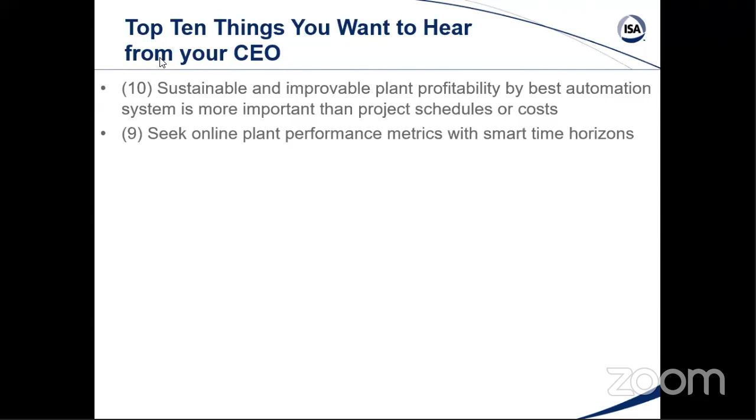Seek online plant performance metrics with smart time horizons - do you think they could understand what's smart? Take the time to learn new technologies and exploit them, like the digital twin.

Read and understand my books. Apply the best practices of the handbook we just finished - Hunter and I just finished it. I've read and understood the automation competency model.

I did a Control Talk column on this, and I don't think hardly anybody in ISA knew about it. If you go to their website, you can find something about it, but it's really not a key part of it - it's some separate organization, the Automation Federation. But we actually have helped them revise and update this in the last 10 years. There's actually an automation competency model, and it goes into what we think are the skills that are beneficial for different types of jobs in the automation industry.

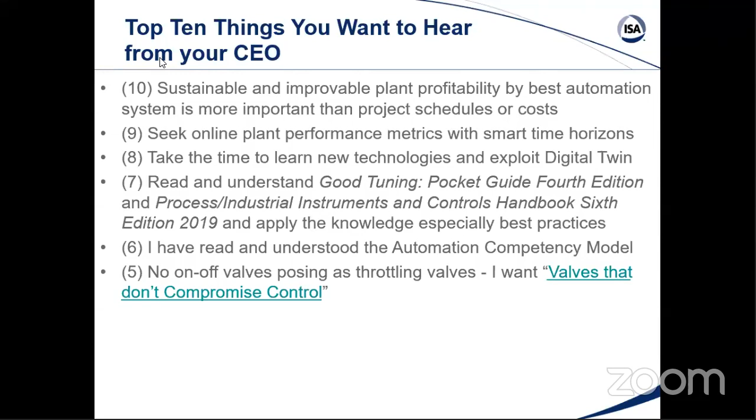No on-off valves posing as throttling valves. I want valves that don't compromise control - that's been my mission. Because it started out with surge valves causing all kinds of headaches, but it went way beyond that. People buying valves because, you know, on their spec sheet it says what is the leakage - oh, less leakage is better, so that was their primary consideration. Tight shut-off valves, piping valves that met the piping spec, had huge capacities - big capacity, minimum leakage. What can be better than that, right?

I want what is truly important for measurements and valves. That would be nice for a CEO to say that. And these are the links - when you see that, those are the hyperlinks.

No low bid packaged equipment - boy, I've been burnt by packaged equipment. Make innovative process control improvements - I'm not sure they would know what a process control improvement is. And finally, you decide what is best.

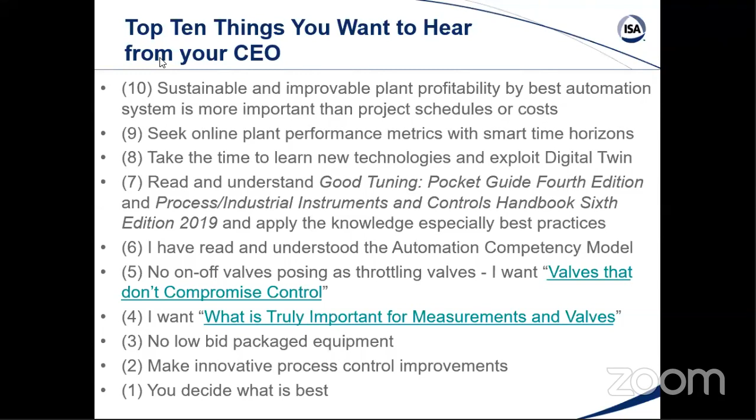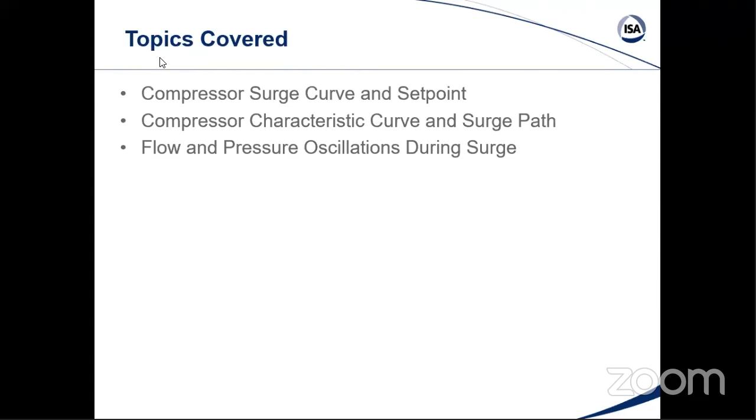Wouldn't you like to hear that? Okay, topics covered: compressor surge curve and set point, getting at the heart of the problem and really why we have this extreme behavior. And we see that in terms of the characteristic curve, and the path of surge, and flow and pressure oscillation during surge.

And what can we do for compressor surge protection and efficiency maximization? What are the sources of the automation system dynamics? Compressor control systems are very sensitive to everything being fast enough. And the question is, how fast is fast, and how critical is that?

How to make valve response faster? There's been big misconceptions that date back probably 50 years. Valve alerts are what you should be concerned about.

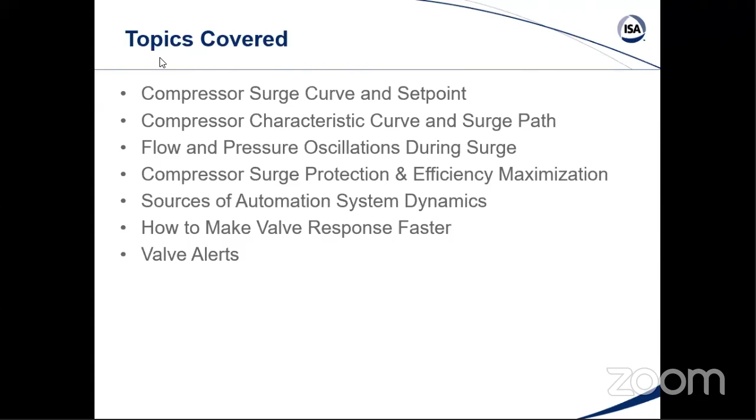Digital twin use, improvements offered, opportunities, and new blocks. Digital twin is the new name for doing a virtual plant - I've been told not to use that term anymore. It has to do with the fact that the virtual plant may be considered to be something that is necessarily in the cloud, even though in our case it wasn't - it was on our laptops. But anyway, the term is digital twin now, and we'll get into that. I'm kind of understanding now why we say that, and how I've had to get with what really is the terms that marketing and people higher up than me really want to hear.

Details on control system implementation, best practices, and what are the resources?

Okay, well, whoops. How do we advance? I wanted to go to the next page. I hit the arrow and it just rebuilds. So... space bar? Oh.

Okay, the animation is kind of messing things up. So if I went through the whole animation again, would it have moved to the next slide? I don't know. All right, we'll find out.

Now, the objective is to keep the operating point to the right of the surge curve. So why not generate a set point that's kind of parallel to the surge curve? And it literally is a curve. For a centrifugal compressor, it tends to have this type of shape, an exponential shape.

Here, if it's an axial compressor, it would tend to bend over here. But for centrifugal compressors, it tends to just continue on like that. Each characteristic curve for a particular speed gets steep, and then it gets flatter and flatter. And the point where the slope is 0 is the surge point. That's how you know you're at surge.

Now, if you think about this, if you go along here, as the pressure goes up, you're going to have more of a driving force to force flow. So it'll tend to self-regulate itself to an extent, and it's got a negative slope here. That's providing the negative feedback in the process that is providing some self-regulation. So that helps. However, when you get to 0 slope, it's probably too late.

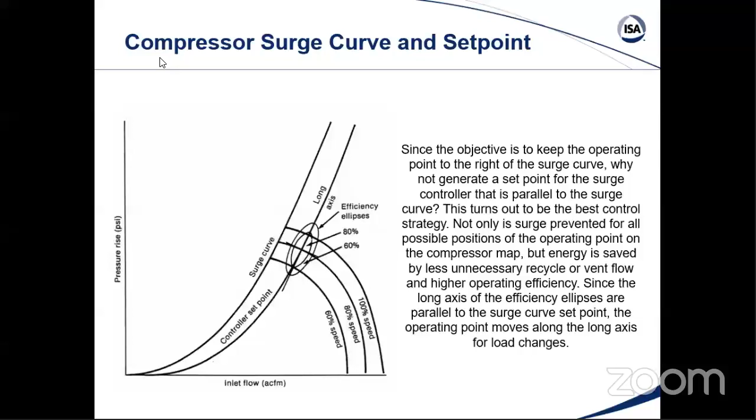So we're going to look at what's on the other side of that surge curve. I know you're probably pretty excited about this right now, the mystery.

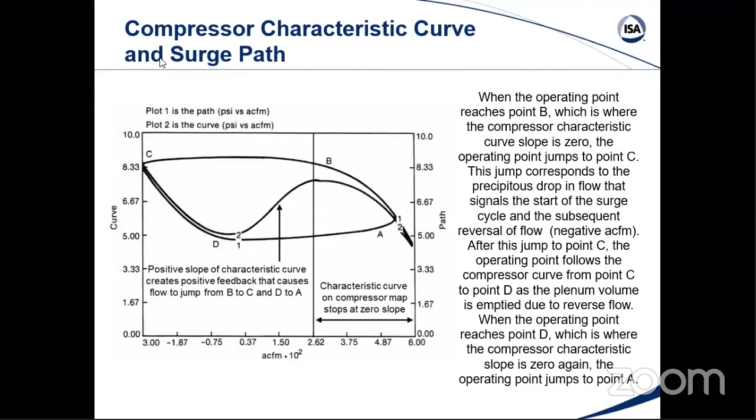So these are the oscillations, pretty dramatic. It's interesting, these periods here are faster because it was like a laboratory or pilot plant situation. Industrial plants, the oscillation periods tend to be about 1 to 2 seconds, which are still incredibly fast.

I once thought, well, if I just had a very fast analog control system and a very fast valve, it could get me out of surge. But these oscillations are so extreme, being a period of 1 to 2 seconds, you can just imagine what a feedback controller is thinking and trying to do in that time period.

In fact, the clue was, I kind of knew this, but the operator, he saw these few surge cycles and he stepped in right away and put it in manual and opened up the valve to a point where it would prevent surge. And that turns out to be the solution. But you want intelligence to do that automatically, not rely upon an operator being that attentive. We were testing something, so we were very attentive, but that's not normally the case.

And so I call it an open loop backup, and there's other ways of maybe accomplishing this, but you're not on feedback control, you're not on automatic control. You have taken some intelligence and you have positioned the surge valve to a point where it ensures you're to the right of the surge curve. And you hold it there for things to stabilize for maybe at least 10 seconds. And there can be additional intelligence, like you could start to slowly close it or even start to open it even more if you felt like you were too close to the surge curve. You eventually then let the feedback controller take over when everything is stabilized.

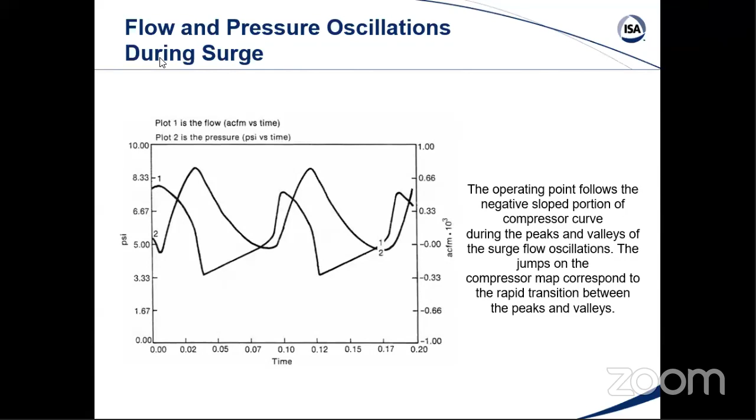This is the control system we use typically. You have the standard PID feedback control system that is getting a flow controller on a suction flow. It's advantageous for it to be a suction flow measurement because you have less of an issue of pressure and temperature compensation. If you have a discharge flow measurement, you normally have to pressure and temperature compensate it back to the suction conditions.

So it's advantageous to have a suction flow meter and then to have the pressure rise across the compressor, that is like the y-axis of that compressor map, to generate a surge curve, that surge set point that is parallel to the surge curve, and that becomes the set point for the flow controller. And then you would like to probably have more than one valve to protect you in case one of these sticks, particularly if you're one of those people that said, okay, the best valve is the one with the highest capacity and lowest leakage. Well, it's often likely to stick in the closed position.

Particularly at higher temperatures, a valve can stick if it's not being used a lot. Hopefully that valve stays closed, but that makes it more likely to stick. So you would like to have at least two valves, and you need an open loop backup. You need to make sure you're detecting the surge as a derivative of the flow to trigger that, which then puts the controller into remote output and holds it there with an intelligent output to prevent surge. You may be wasting energy for those 10 seconds, but that's better than damaging your compressor and potentially shutting down the unit.

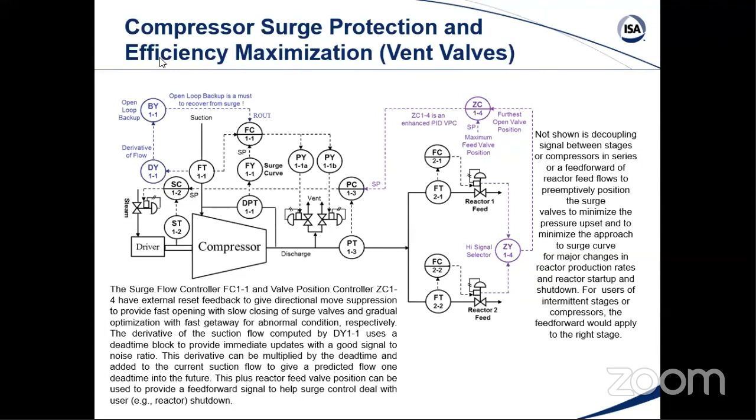Now, these surge valves are not venting, they are going to recycle. And if it's recycling, typically there's a heat exchanger, because if it's going around in a circle, it's going to keep heating up. So you have to make sure you're taking that energy out and cooling it so high heat doesn't cause even more damage to the compressor. It's basically a similar control strategy otherwise.

Now I show recycle here, and this could be used for compressors in series or multi-stage compressors. One of the companies that was originally a source of a lot of knowledge on compressor control was called Compressor Controls Corporation. I don't know if you've heard of them, but the founder came over here from Russia and started that company, Staroselsky, and wrote a bunch of key articles, very intelligent articles, back in the 70s.

Of course, he wants to sell you their special controller to do all of that. But the articles were saying that whether it's compressors in series or stages in series, he advocated having separate surge controllers on each stage. If you need to do some decoupling or feed forward, you can take care of the interaction that might occur between having separate surge control valves for each stage. You may also want to do some intelligent ratio of how much compressor pressure rise you have across each compressor, called compression ratio dividing or pressure dividing. If you have compressors in parallel, each would have its own surge control system, dividing up the flow requirements among the compressors in parallel. Basically, each compressor or each stage would have a complete control system like this to protect itself.

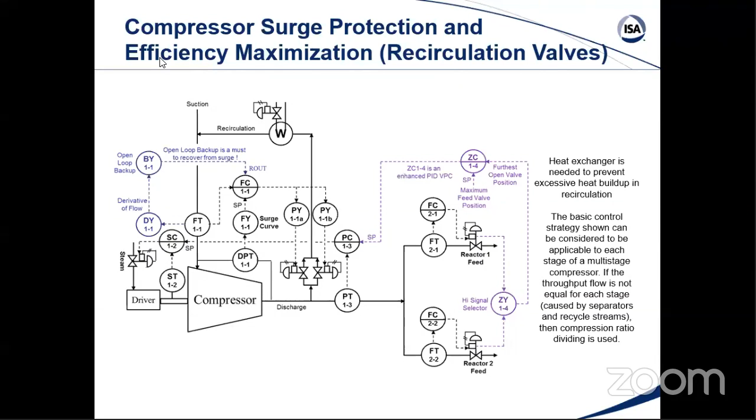Now, this loop, people don't realize I think how many loops are really seriously affected by the automation system dynamics. And so this is your job, and you have the power here, and you should have the knowledge to make sure that you have the dynamics, the speed of response needed.

And it turns out, if you look back in general, for pressure flow, in general, the dynamics of the control system, the automation system, are slower than the process. And so what you do there is going to affect the performance, how fast your system is.

Now, with surge control, because you're trying to deal with a phenomenon that was extremely fast, you're taking this to the extreme. And so you want to make sure that you have the fastest valve, minimum delay, lag, and stroking time. Actually, we can approximate the valve response once you get beyond the deadband or resolution, which is a whole nother story, as a velocity limited exponential response.

So it's a slewing rate, but there's a time constant and pre-stroke dead time associated with that. Compressor Controls Corporation, I think, maybe said 2 seconds, but I think they're talking about big strokes. Anyway, it's more like 1 second is what you ought to make sure you have. So that's pretty darn fast, particularly if you're having like a 24-inch valve, right?

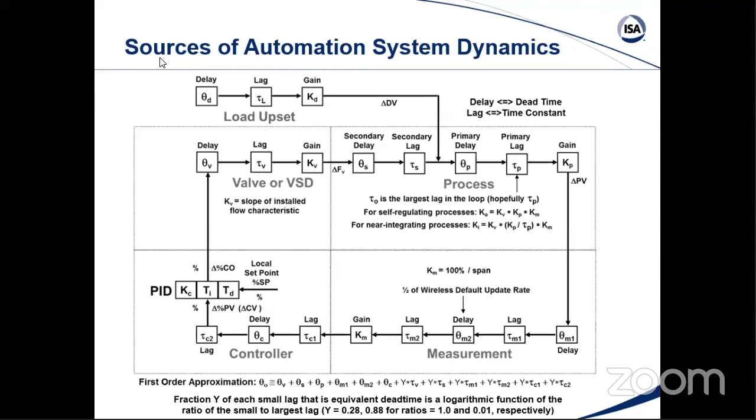One of the things that was really strange to me: a very brilliant person, who will remain nameless, did Nyquist plot studies back in the 70s or 60s, I guess. And he concluded that if you have a fast loop, you should not use a positioner. How many people have heard that rule?

Maybe it's a good rule from a standpoint of Nyquist plots, but when you get into reality, particularly with fast controllers, and more importantly the situation I ran into, that's what I saw in the paper, and it was not only a paper, it was like a prevalent guideline. Even my cohort, Stan Weiner, who I did the column with until his passing, and co-authored books with, still cited that rule.

Fast loop, use a booster instead of a positioner. Well, so I tried this out on a plant, and the technician said, 'Oh, you better not do that, Greg.' I said, 'No, whoops, I've learned unequivocally I shouldn't have that positioner there, so I'll replace it with a booster.' And that's what I did.

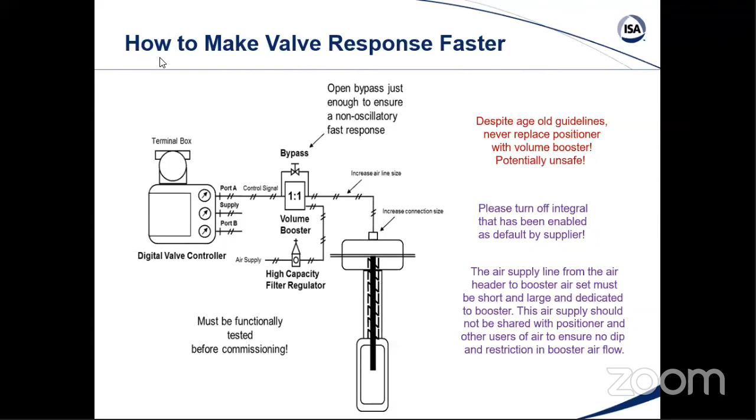Yeah, so we really don't want integral action in the positioner. So, valve alerts - common mistakes: minimizing leakage, because that's what the valve spec has. Maximizing capacity, because that's what the valve spec says. Minimizing cost, right, that's good. What this leads to is more like an on-off valve.

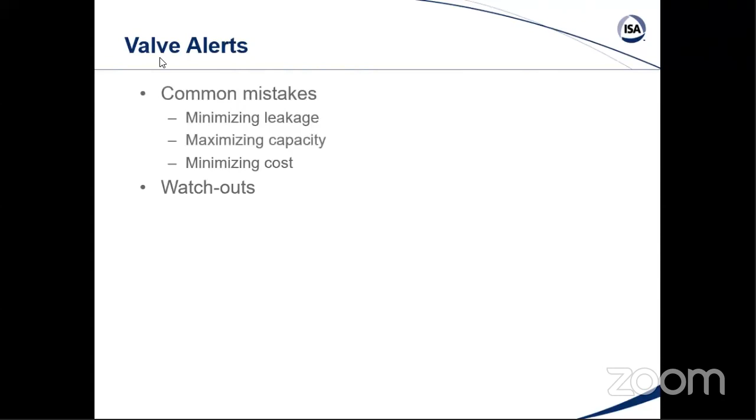Watchouts: actuators sized for loose packing at room temperature. To help prevent this, we say whatever actuator size your vendor came up with, ask him to give you 150% more of that in terms of thrust or torque, because he's sizing it for some conditions, saving you money with a smaller actuator, and that's what he stocks.

I get very sensitive to backlash and deadband for pH control, and there were some very good valves that had good specs, but when we actually ordered them and said we want the deadband and stiction to be less than 0.25%, they said we can't do it because the actuator we put on there is in the warehouse - that's the standard actuator, it's going to be 0.6 or 0.7%. I said, well, let's replace the actuator. Well, it's a special then, it's not in stock, it'll take 3 months delivery. I didn't have 3 months anyway.

So it's really frustrating, and Hunter Vegas and I are on the same page for a lot of things - this is the same thing, he's frustrated too. Undersized actuators.

Resolution and deadband tests are typically done at positions greater than 40%. You ask the supplier what is the deadband resolution - he inevitably is going to test it for greater than 40%, because if he tests it near the closed position, where you're trying to minimize leakage and it's rubbing against the seal or seat, what happens? It's amazing how much worse it gets, even if you're at 10 or 20%. So if you're going to be operating at 10 or 20%, you ask them what is the resolution of deadband there.

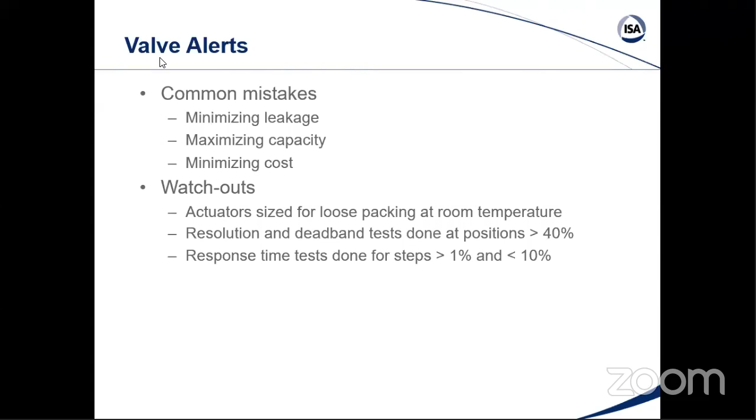Response time tests - another mistake is they're done for greater than 1% and less than 10%. If they're done for less than 10%, you really don't see the effect of the slewing rate. If they're done for greater than 1%, you don't get into the actuator sensitivity, positioner sensitivity. It turned out some positioners won't respond at all to changes less than 1% - they're spool type positioners.

And there's some very good positioners that unfortunately don't respond if the change is less than 0.5%, and they start to deteriorate - the response time goes from 1 or 2 seconds to like 5 or 6 seconds. Then you get down to 0.25% and it goes to 40 seconds, and if you change directions, it goes to 80 seconds. Now how small are those changes that your controller output is making - are they 1%, 2% each scan? They often are making very small changes. And what happens? The valve doesn't move, or even worse, you get into oscillations.

So on-off valves, posing as throttle valves, huge error between actuator shaft feedback and the internal ball or disc position. There is a connection from the shaft to the stem, and then from the stem to the ball or disc. If that connection isn't integrally cast, you've got a problem. And if the connection from the shaft to the stem isn't splined for a rotary valve, you've got a problem there too. It's amazing.

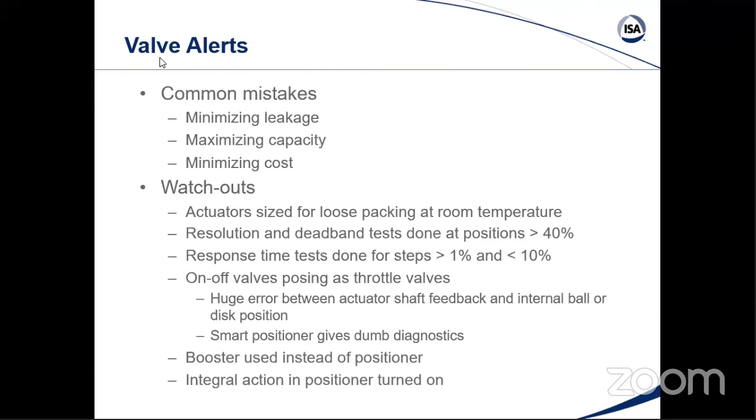The key is if you put it in manual, the oscillations go away. Anyway, I took it into the shop - same situation. Smart positioner saying everything's fine, but looking at the ball, it didn't move for 8 or 9%. Using booster instead of positioner, we talked about that, and then integral action on the positioner - okay, I think if I do this one more time, it'll go. Interesting. So I've used simulation to become much more intelligent all my life about these things.

Trying out these scenarios in a very safe, exploratory environment to figure out really what's going on. And so here with the digital twin, we now have the actual control system, including configuration, displays, alarms, and historian tools. You can import, export, copy and paste - it's literally the same files.

Now the I/O assignments, since they're not connected to the field, they could be - you could actually connect up to the I/O. But if you're not connected to I/O and you're connecting to the simulation, then the I/O assignment changes to be a simulation value instead of an actual field value. But you want to make sure, in the dynamic simulation - this isn't typically done, but it's been my focus - you include not only the dynamics of the process, but also the valves and measurements. The controller dynamics come in through there, but for the measurements and valves, you want to make sure you put them into the simulation.

I think the key thing is you can show the before and after benefits of a solution from online metrics. I was at the AIChE symposium and it was amazing - I kind of saw this and knew this, but the guys were saying the operators just put things in manual, and you tell them, well, don't do that. But how do you prove to them that it's hurting the process if they're still running? It's a continuous process, and the only way to really prove that is to have some online metrics. There are some plants that do that.

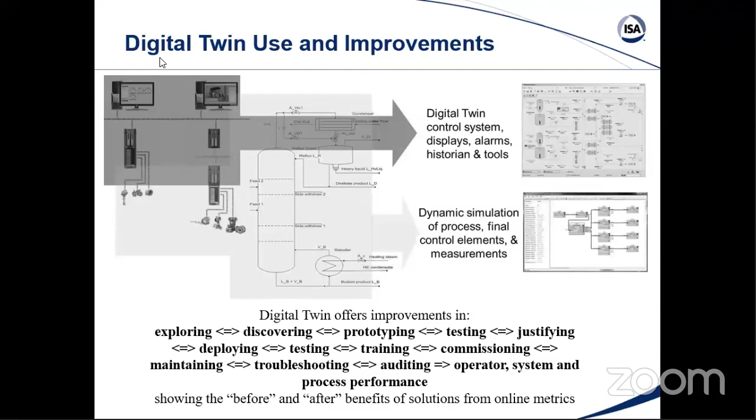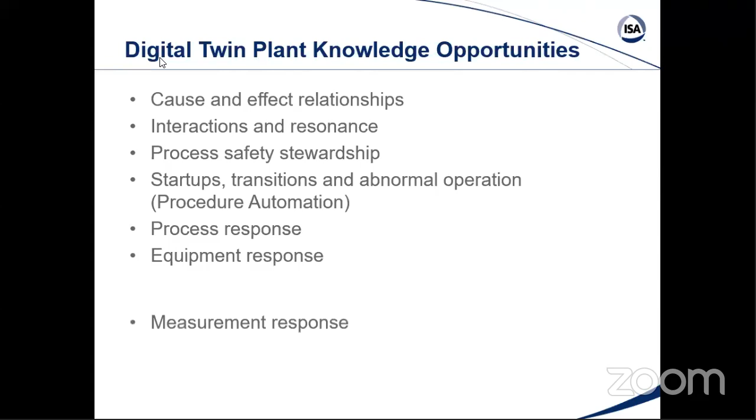So opportunities: cause and effect relationships, interaction, resonance, process safety, stewardship, startup transitions, abnormal operations, something called procedure automation - automating how you handle those situations - process response. We get to learn about all these things by using a digital twin.

I've developed these blocks for compressor surge using momentum balance, including that characteristic curve you don't see - that's mysterious, but the cause of all the crazy behavior. And a future value block that will detect and predict surge, with a good signal to noise ratio. It looks at changes in the compressor characteristic curves.

It can identify the slope. So if it sees a point approaching zero slope, it knows you're very close to the surge curve, and you can capture that point. Surge curves can change over time with wear and tear on compressors, so it can update the surge curve.

And then, in order to make sure you understand the effects of deadband and stiction and the valve response, this is a key block right here.

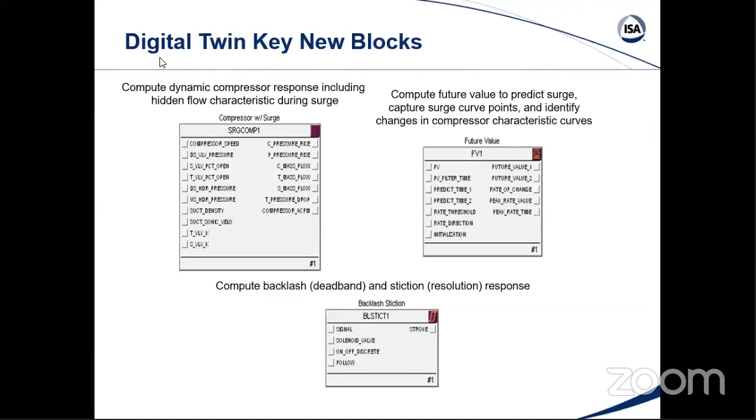Some details - I think we've gone over this. I didn't say this, but that future value block really just keys on a dead time block. That sounds bad, dead time block, but you're taking the input and the output and choosing a delay signal that gives you a good difference. As soon as you get an update on the input, you have an update of the rate of change.

It's not like some calculations where you wait a time interval and then make a calculation of what the change was. Here, as fast as that scan rate is - like 0.05 seconds - I'm getting an updated slope and an updated rate of change every 0.05 seconds.

It's kind of a misunderstood - well, I don't call it misunderstood, but a not-recognized opportunity. And that plays a big role in the system.

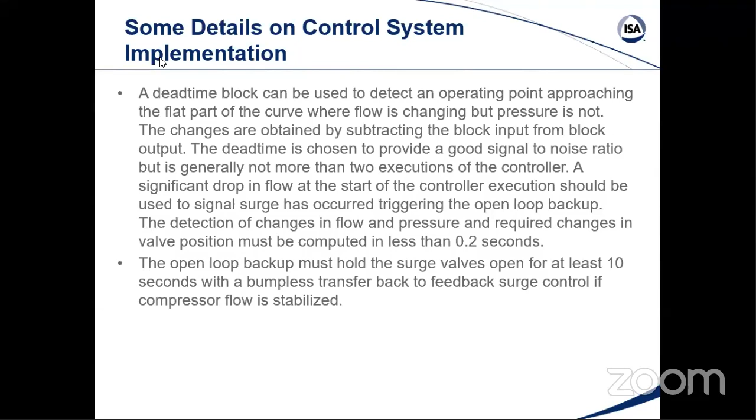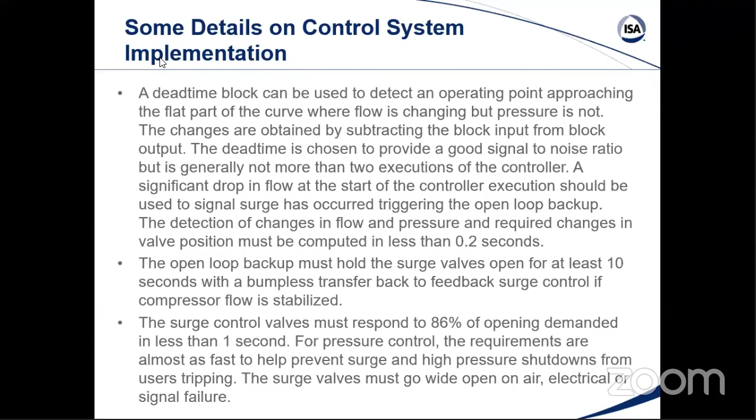It must open the surge valves for at least 10 seconds with a bumpless transfer back to feedback and surge control once the flow is stabilized. The surge valves must reach 86% of the opening demanded in less than 1 second. For pressure control, the requirements are almost as fast, to help prevent surge and high pressure shutdowns. And the surge valves must go wide open on air, electrical, or signal failure.

Compressor suppliers should provide the surge curve for different operating conditions. The surge curve should be updated online by detection of approach to the flat part of the characteristic curve. A precipitous drop in flow, negative flow, may not be measurable by the flow meter, and may be prevented in some cases by equipment and piping design, including check valves.

The number of surge oscillations and the amplitude of oscillation should be historized, along with the number of excursions to a flat characteristic curve that did not result in surge, but indicated you were really darn close. This requires a fast historian update time.

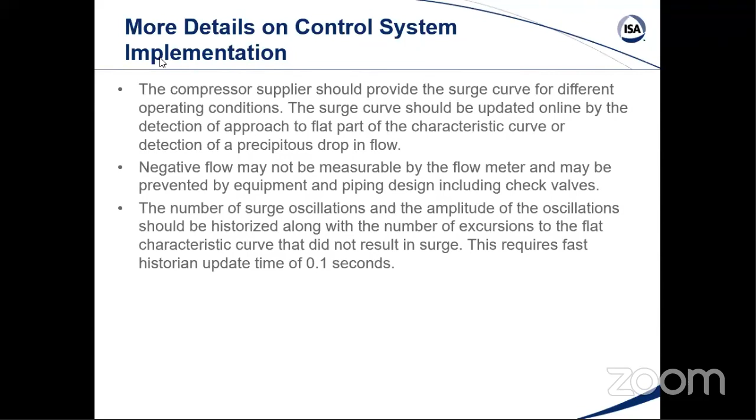The point at which the surge valve starts to open can be determined by when the contribution from the proportional mode exceeds that of the integral mode. If the integral contribution does not drop below the proportional contribution until reversal of sign, the surge valve will not open until the suction flow drops below its set point.

In general, that's getting a little dangerous, and we want the integral contribution not to overrule the proportional - it should start out at the output limit.

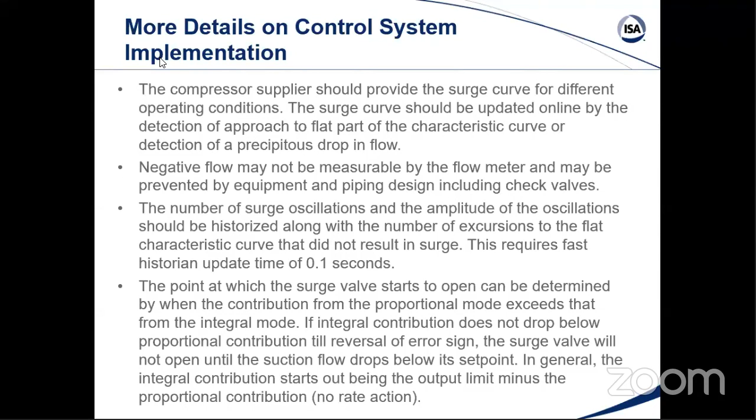There are some features that allow you to take care of that, to make sure the integral mode doesn't overrule the proportional mode until it's too late.

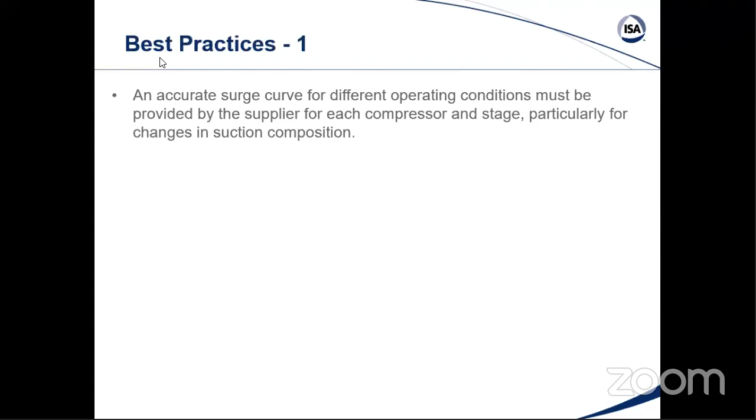Best practices: accurate surge curve for different operating conditions provided by the supplier for each compressor and stage, particularly for changes in suction composition. Surge curve should be updated online by detection of operating flow approaching a flat part of the characteristic curve, indicating approach to the curve, and a precipitous drop in flow in less than 0.05 seconds, indicating an actual surge. The number of close approaches to the surge curve, the number of actual surge cycles, and the surge amplitude should be historized.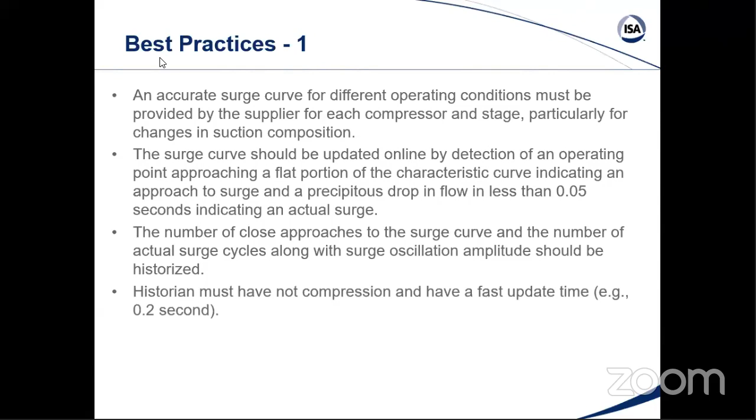Here I said 0.2 seconds, but the previous slide said 0.1. I prefer 0.1. Surge control valves must fail open.

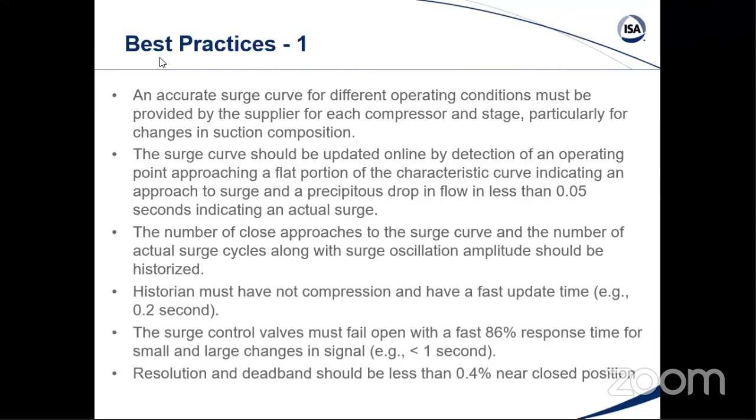I think I said that before. Resolution deadband should be less than 0.4% near the closed position. Last point here: transmitters must have damping set to minimum.

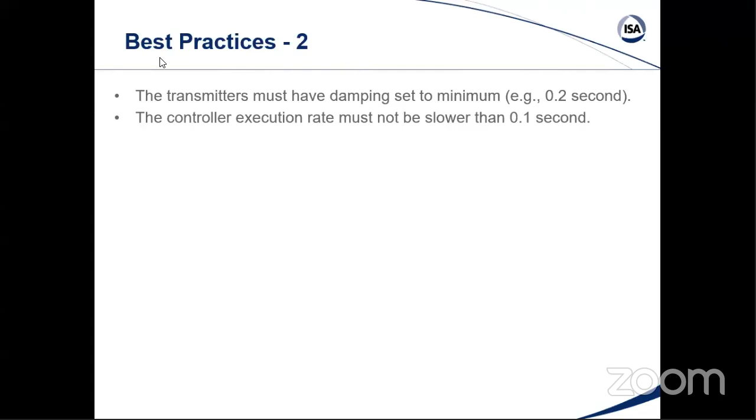Controller execution rate must not be slower than 0.1 seconds. Some people would say 0.05 seconds. Signal filters greater than 0.05 seconds must not be used.

An open loop backup must activate and hold the surge valves open. Talked about that before. Individual surge lines and surge control must be used to prevent each compressor or stage from going into surge.

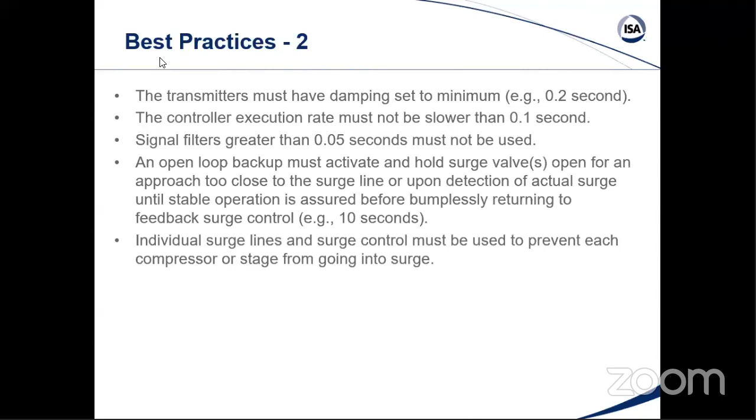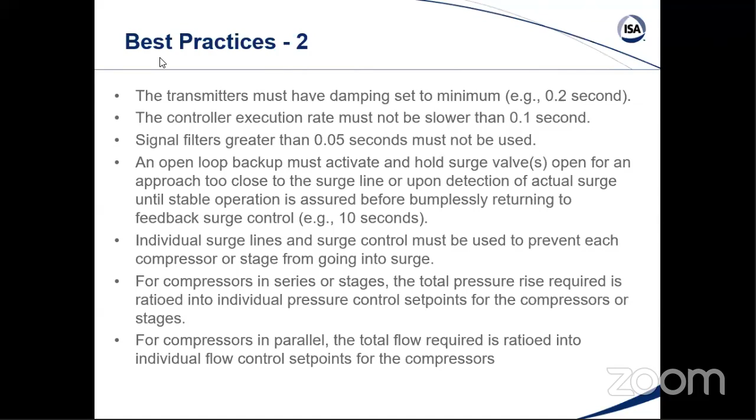For compressors in series or stages, the total pressure rise requires ratioing into individual pressure control set points for the compressors or stages. For compressors in parallel, the total flow requires ratioing to individual flow set points for the compressors.

Sorry I ran over, but there was a lot I tend to talk about.

Any questions in the room? We'll hand the mic so the web audience can ask too. Quick question: in my formative years, the players were CCC, then CAC, and then Petrotech. I've been kind of out of that area for a while, but how common is this now? Is there hundreds of vendors or a dozen? What's the scope of that?